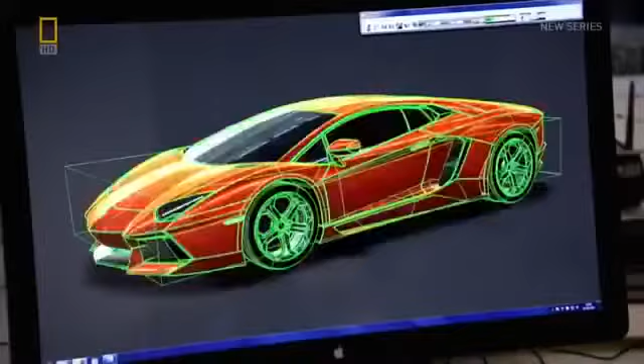But this will be no simple reworking of Lamborghini's old flagship models. Its engineers and designers are given the task of starting with a completely clean slate. And at its mega factory in northern Italy, the Lamborghini team has been stretched to its limits to fulfill those expectations. Now, as its latest creation takes to the road, it will be seen if the high-risk strategy has paid off.

Lamborghini has been responsible for some of the world's most iconic sports cars of the past half-century. 350 GT, Miura, Countach, Diablo. The brand has achieved global recognition for its no-holds-barred approach to automotive engineering. Its extreme and powerful machines have placed it among the supercar manufacturing elite for decades.

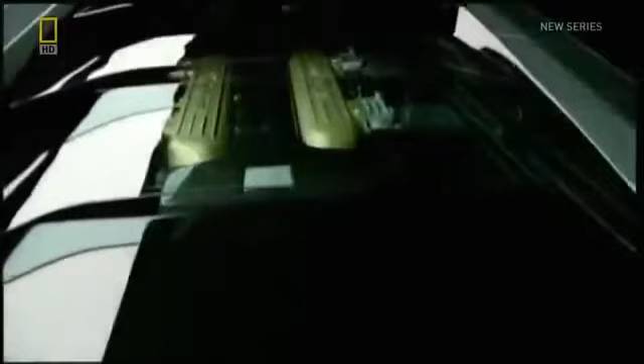But there's no room for complacency in this increasingly crowded marketplace. And a decade since the launch of their last flagship model, the Murcielago, it's time for Lamborghini to flex its muscles once again.

It's up to Stefan Winkelmann, the company's CEO, to come up with a bold approach. One of the toughest things was to give the right briefing, and it took us weeks and months. And once I went home and I was thinking about it, so easy, and it's just down to 2 words: no competitors.

4 years of intense development follow, conducted in fiercely secretive conditions. Our factory was as close as Fort Knox. We had to prevent anybody from coming in and taking any picture to avoid leakages.

But finally, in March 2011, at the Geneva Motor Show, Lamborghini casts off the secrecy and unveils its latest model, the Aventador LP700-4. Its launch has huge implications for the future of the company.

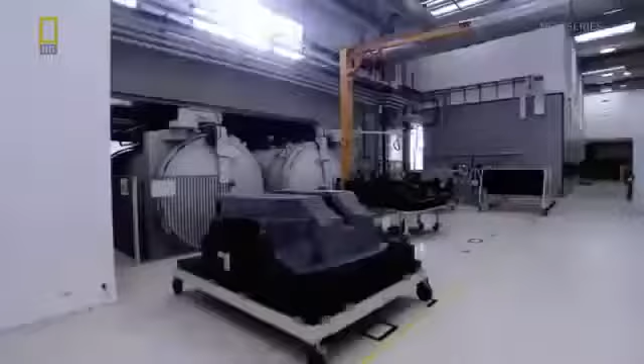But remarkably, speed isn't even top of Lamborghini's priorities for the Aventador. Stefan Winkelmann has laid out his vision in a manifesto for the future of the supercar. Now in our days, it's much more important to speak about the power-to-weight ratio, so the balance between the power of the car and the weight of the car. And for us in the future, it's much more important to reduce the weight because you get a better feeling, a better driving experience. The Aventador is the first test of this new blueprint.

The National Geographic Channel has been given unique access at the Lamborghini factory to witness the creation of some of the car's first incarnations.

This is Sant'Agata Bolognese, a typically picturesque town in the heart of Italy's Emilia-Romagna district, but it is in fact anything but typical, as it's home to Lamborghini, one of the world's most renowned supercar manufacturers. The factory is situated in the heart of what is known as Motor Valley in northern Italy.

Sant'Agata is intrinsically linked to Lamborghini's success, according to its head of communications, Raffaello Porro. Everybody in the world recognizes our cars come from Sant'Agata Bolognese. And so our factory is a kind of temple where people come, they can say it's a pilgrimage, to visit where those cars come from.

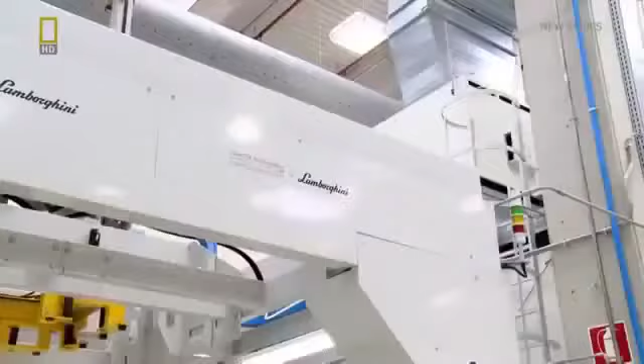The factory has seen many changes over the years, but its purpose has never wavered: to produce vehicles that challenge the status quo. And a largely local workforce is a vital part of that ethos.

They're coming from this region, not even from the region, they're coming from this part of Emilia. You know, we are in Emilia-Romagna, it's the Motor Valley, and this is in Emilia. So a lot of our people are not only living here, they were born here, they are here since generations, and a lot of workers we have in our factory, in our plant, are here at the second generation.

These people are Lamborghini's lifeblood. Over 400 individuals working with a singular aim, to produce high-end vehicles that consistently capture the public's imagination.

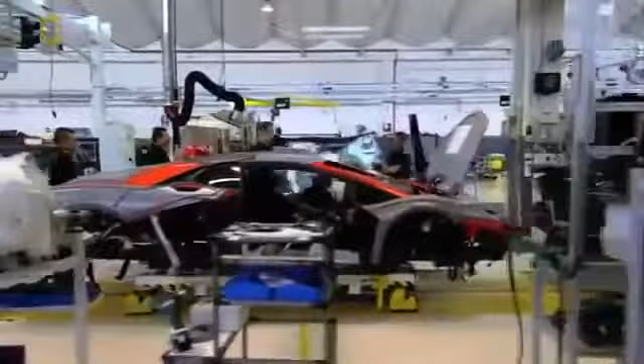In the last couple of decades, a new breed of creative and high-tech vehicle specialists has emerged. Companies such as Pagani and Koenigsegg have set their sights on toppling the most revered names in supercar engineering. Names like Lamborghini.

But it's unlikely that this Italian giant will let its mantle fall without putting up a fight, an attitude embodied in the company's emblem, the Raging Bull, partly inspired by the bravery of Spain's legendary fighting bulls, one of which showed such fearlessness in battle that it was awarded a trophy for its courage in 1993.

Its name was Aventador, and almost 20 years later its legacy lives on in Lamborghini's latest model. It's Aventador's battling spirit that Lamborghini's development team must channel.

In 2007, they're faced with the daunting task of creating a supercar that sets the standard for all others. Maurizio Reggiani, head of research and development, realizes that the only way of doing so is to take a step into the unknown.

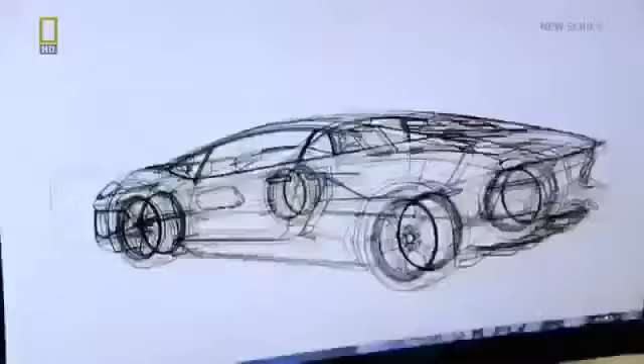To start from a completely clean slate is extremely high risk, and it's up to Reggiani to convince the board that it's the right thing to do.

This was one of the hardest things. Why? Because the project we were presenting had nothing in common with the old Murcielago, not with anything that existed in production at all. So it really meant beginning from scratch, with all the risks that come with that.

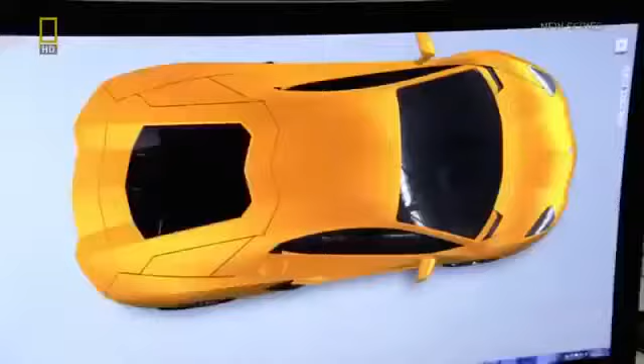But the board decides the risk is worth taking. At the end of the day, they understood very well, because this is again about what Lamborghini is all about - now, to recreate and to be always revolutionary in the approach.

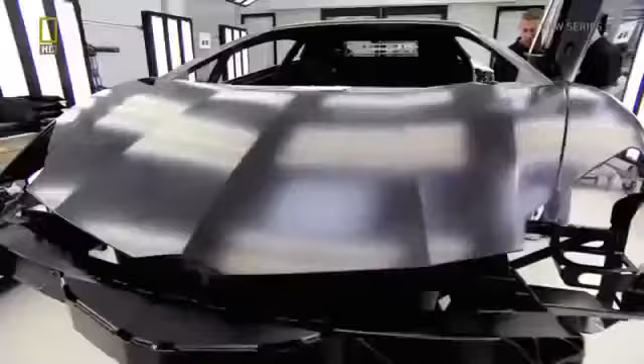The spirit of innovation is apparent in every fibre of the Aventador, as Lamborghini know that the fight to stay at the top won't be won through half measures. And nowhere is that combative approach more apparent than in their focus on lightweight construction, which they've taken to new levels with an entirely new concept for road cars.

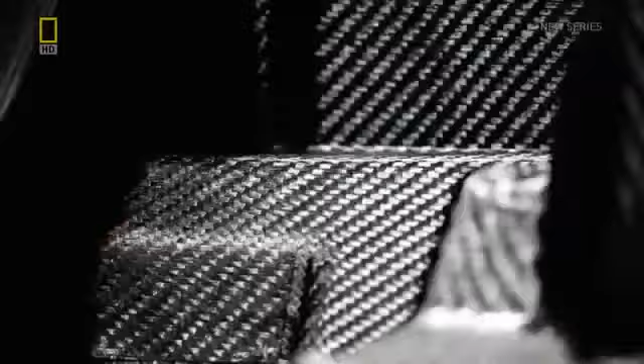A full carbon fibre monocoque. These structures are common in racing cars, but the high cost of materials and laborious production methods have made them unavailable to supercar manufacturers, who've had to combine carbon fibre with cheaper, heavier elements, such as aluminium. That is, until now.

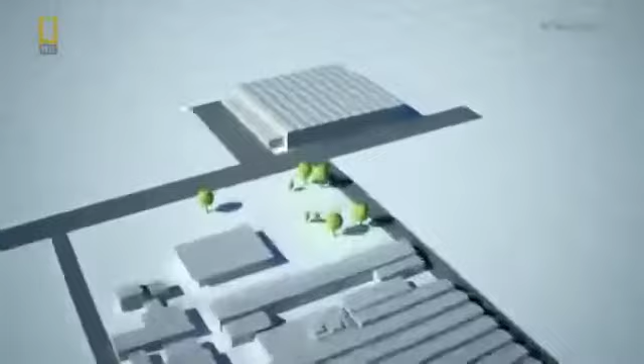The development team has devised a method that allows this race car technology to be mass-produced. But it requires a specialist facility that's up to the task. So in 2009 they build a whole new mega factory just down the road from the company headquarters, devoted to constructing the Aventador's unique carbon fibre body.

Which, being just 147.5 kilograms, helps make the Aventador significantly lighter than the Murcielago, considerably improving the all-important power-to-weight ratio, and in turn, the handling.

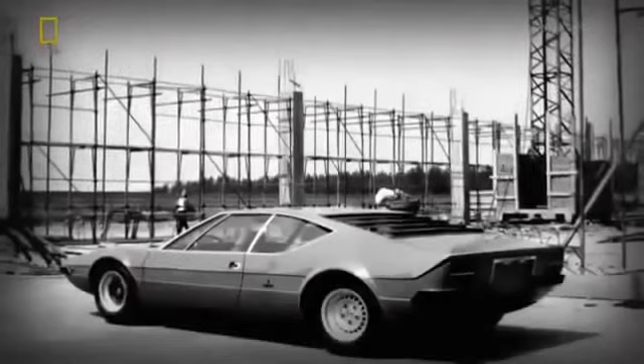Lamborghini hopes that this innovation will stave off the threat by the new wave of rival companies. Lamborghini knows well what it's like to be the cocky young upstart, vying to unsettle the established names, as that's how it began almost 50 years ago.

The man upsetting the status quo back then was the company's founder, Ferruccio Lamborghini. He had made a fortune from a tractor manufacturing business and used some of his money to satisfy his love of sports cars.

According to Lamborghini legend, when he went to Ferrari to critique some of their parts, his views were dismissed. He got a negative response out of some requests he had and proposals to make a better car. And so he said, I will found my own company and I will create the best super sports cars ever.

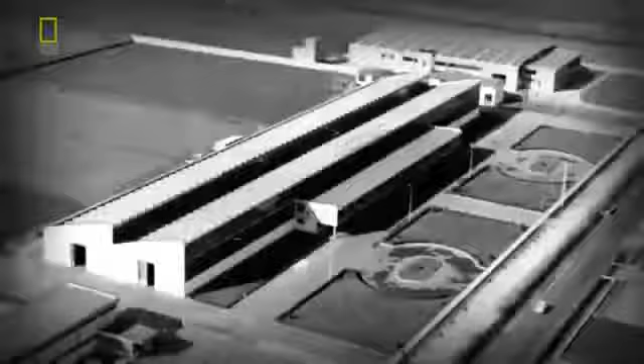He established Automobili Lamborghini in 1963, and for the next few years he toiled furiously to achieve his goal. The cars he created were well received, but it wasn't until the launch of the iconic Miura in 1966 that Lamborghini really made its mark. The tractor maker had succeeded in breaking into the exclusive world of supercars with his bold new enterprise.

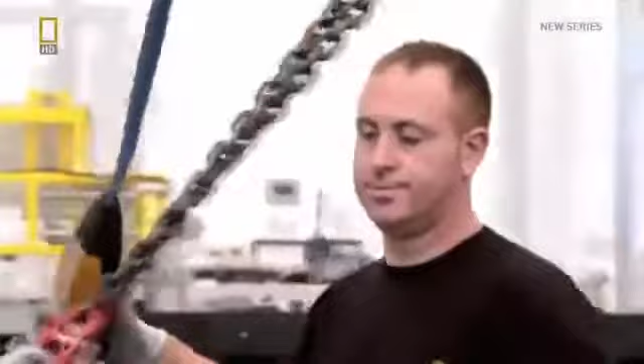Almost 50 years later, despite having joined the ranks of well-established sports car manufacturers, the company still strives to be edgy and uncompromising, as demonstrated by its approach to the area it believes will define the future of sports car engineering: lightweight carbon fibre construction.

The company's relationship with carbon fibre goes back as early as the 1980s, when it created the Countach Evoluzione, a concept car which experimented with the use of composite materials. It was dreamt up by the newly formed Composites Department, whose successor has made many inroads into research and development of lightweight composite materials.

And discoveries made here mean that next door, the company has been able to construct its new carbon fibre production facility.

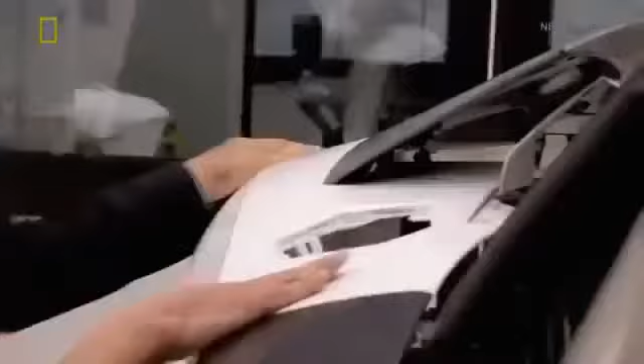The man given this task in 2009 is Ranieri Niccoli, Industrial Director, and he must devise it completely from scratch. When we design and build this factory, we didn't have any automotive benchmark. We were the only one in the automotive business to build and run this kind of technology.

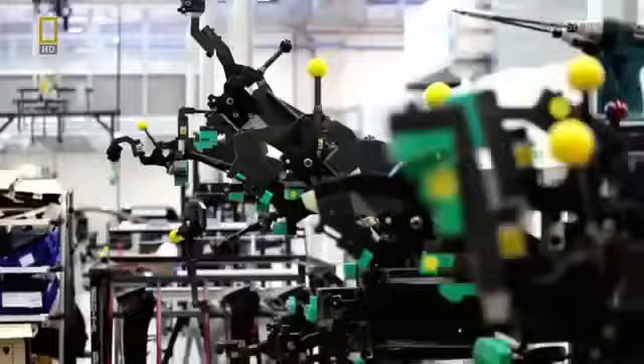So they have to look elsewhere for inspiration. We look to other sectors, for example the aeronautics sector, then we adapt and modify their process to create a Lamborghini production system in order to build our car.

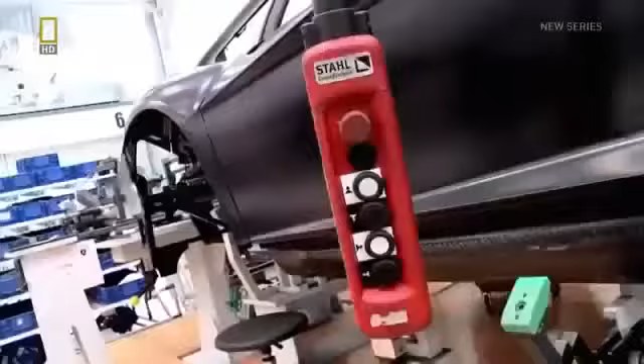The result is 500 square meters of new production space, known as the CFK, devoted entirely to sculpting the Aventador's super lightweight monocoque. Here, 146 carbon fibre specialists toil day and night to create 4 complete monocoques every 24 hours.

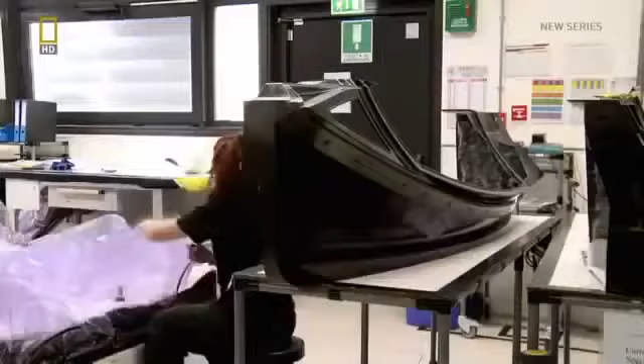To achieve this target, engineers have developed a unique production system. All materials are first cut by an automated machine before being sent for preparation. The material is placed into moulds and laminated in a vacuum bagging process which forces the layers into shape, before being cured in a large pressurized oven known as an autoclave.

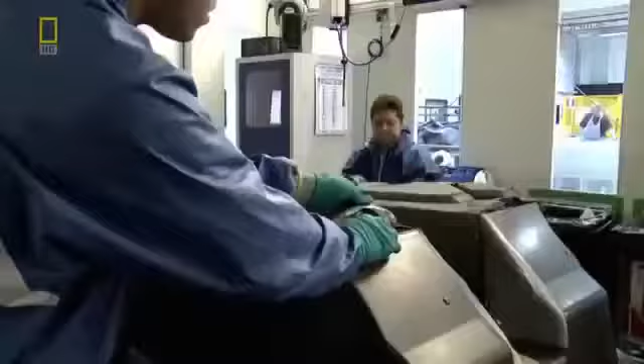Meanwhile, the production of other parts of the monocoque is underway, as operators fine-tune and cut more layers of carbon fibre with the assistance of precision lasers. A special press is used to inject resin into the carbon fibre mats, which transforms them from soft sheets of cloth-like material to a strong, rigid structure.

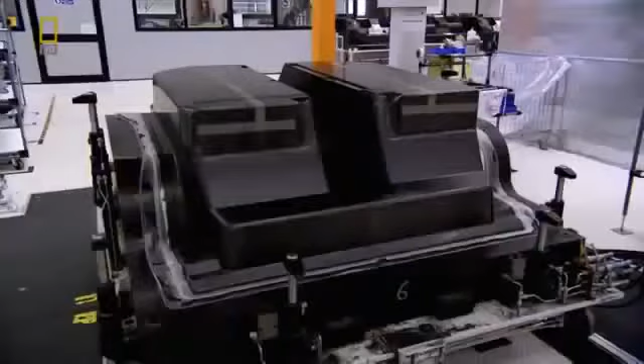After all these processes are over, the 2 key sections are finally recognisable: the base section, known as the tub, and the roof. They're placed in an automated machine, which drills them with holes allowing for attachments to be made later.

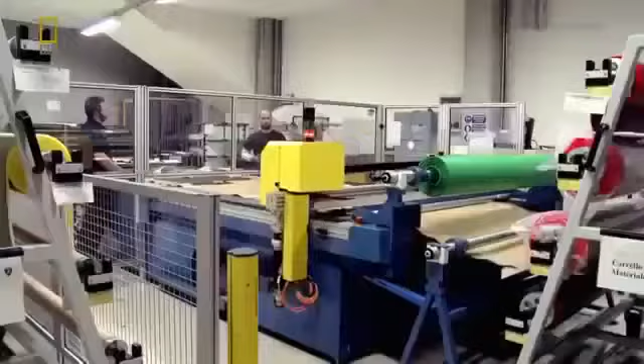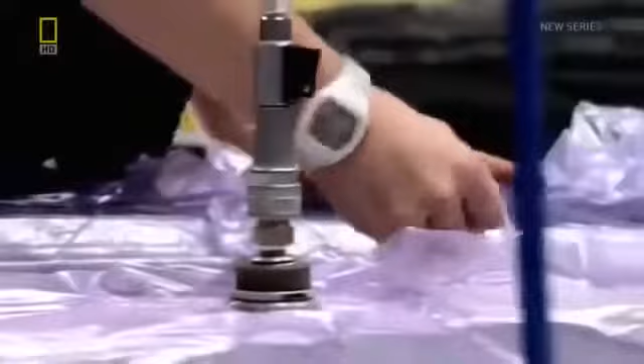Throughout the factory, computer-controlled machines share tasks with human specialists, a partnership that's integral to the Lamborghini production process. The main priority of our plant was to follow the Lamborghini production system, so, with a high degree of craftsmanship, high degree of skill, people, combined with technology, with an automatization process. This was the main challenge that you can also see in our plant.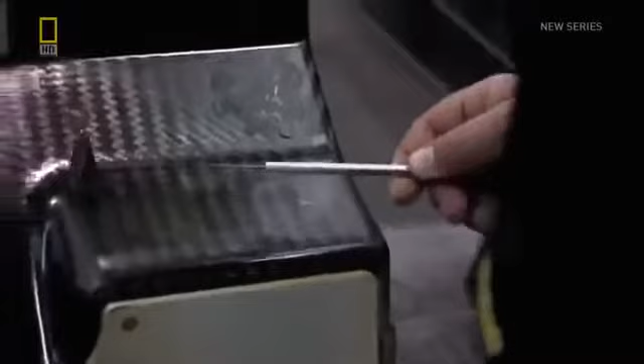Aeronautic-inspired engineering is ingrained in many aspects of the Lamborghini CFK production process, such as this stage, known as the Harmony Hammer Test. In this quality control test, an operator strikes the monocoque section with a specially designed hammer and allows it to vibrate, listening out for areas where air might be trapped in the carbon fibre shell.

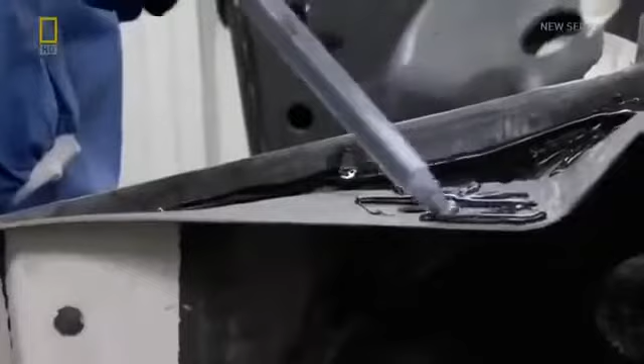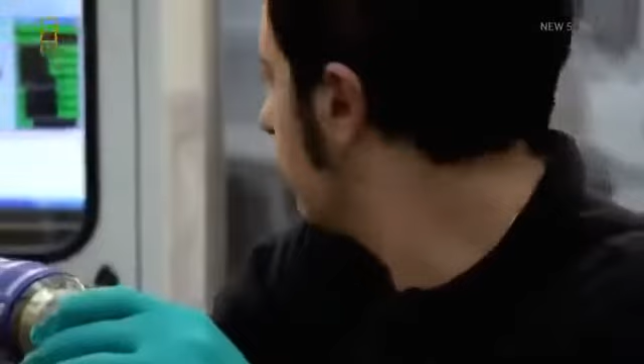Once checked, the parts are ready for their union, as the tub and roof are glued together, turning the monocoque into a single entity. It's essential that the 2 parts of the monocoque are exactly aligned, so workers use a robotic arm with a 3D laser attachment to check that the sections have been coupled correctly.

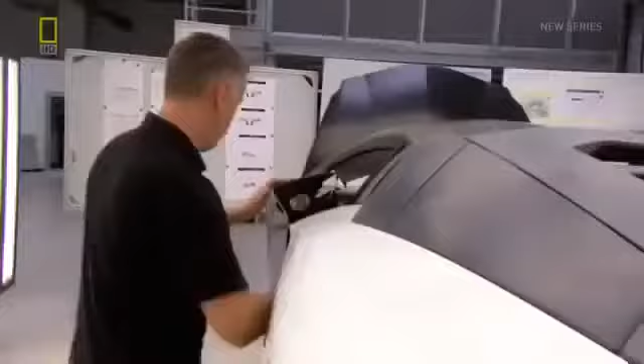Once the correct dimensions are confirmed, metal sections are manually attached to the monocoque and the body is complete. Then it's into a light tunnel where surfaces are quality checked to ensure they're in pristine condition before the Aventador's body is signed off for release.

As the body is ready to leave the carbon fibre plant, it's possible for the first time to see the Aventador's unique geometry taking shape. This extreme design is one of the most recognisable aspects of the Lamborghini DNA, and it's a tradition maintained and pushed forward here, at Lamborghini's Design Centre, or Centro Stile.

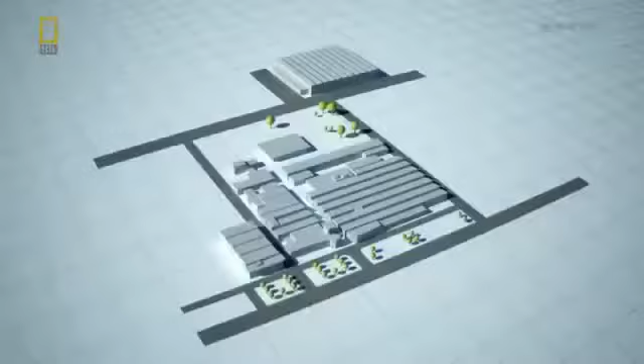The generational leap required of the Aventador does not stop with its engineering capabilities. The look of the car is integral to its ambition.

The design of Lamborghini always has to be revolutionary. Yes, you have to understand, if you see a car in front of you, this can only be a Lamborghini even if you don't know the model. So it's about our ability to create something new, but recognizable at the same time.

The job of the design team and its chief, Filippo Perini, is made even tougher during the earliest phase of the Aventador's development, when the board forces them to compete with outside companies to earn the right to design the new model. And at one point, victory comes close to slipping through their fingers.

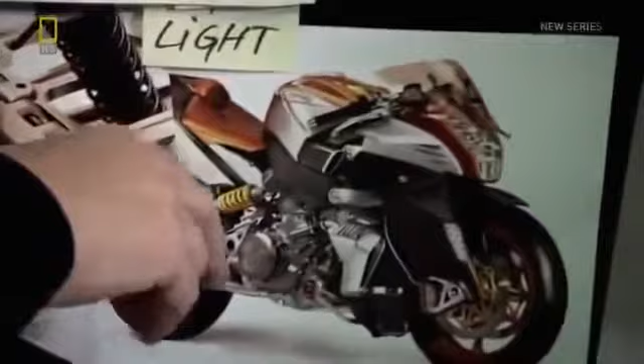Details like the ignition button and TFT screen seem to come direct from a jet fighter cockpit. And the world of aeronautics influences a lot of other style choices besides. We think that aeronautics, airplanes, fighter planes, but even transport planes are the nearest expression to true beauty and the most advanced design that you can have from an artistic point of view, and also of functionality.

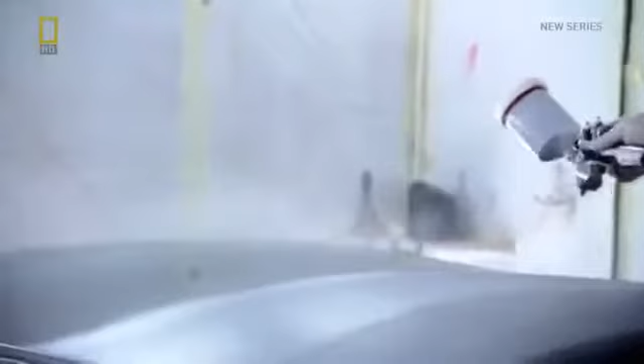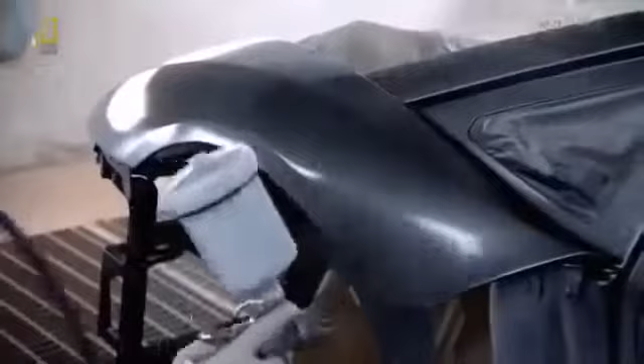After the CFK, it's taken away to be given one of its most important characteristics: its colour. Here at the paint shop, it's lavished with the kind of attention that most cars could only dream of. One of 13 colours are hand-sprayed over every part of the bodywork. 27 pieces are given individual attention by a specialist who covers them with 8 litres of paint. The Aventador, with its extreme lines, requires more man-hours than any other Lamborghini in the past.

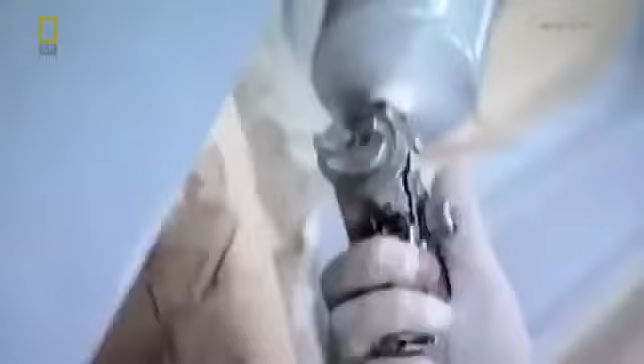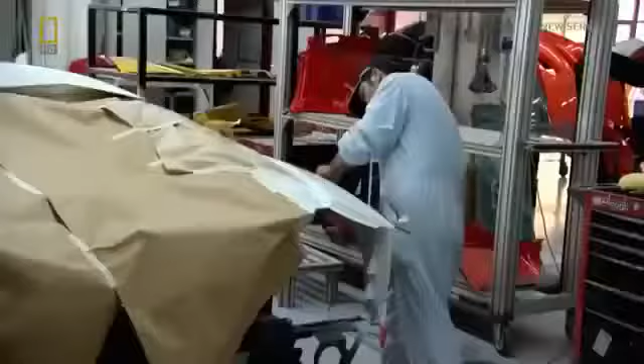Every phase is carried out manually, as only human analysis and dexterity can ensure that each surface is covered with exactly the right amount of paint. In total, 200 man-hours are spent on every single Aventador while at the paint shop. 3 whole days are spent on polishing alone. After being carefully sanded, the Aventador is repeatedly buffed with special materials.

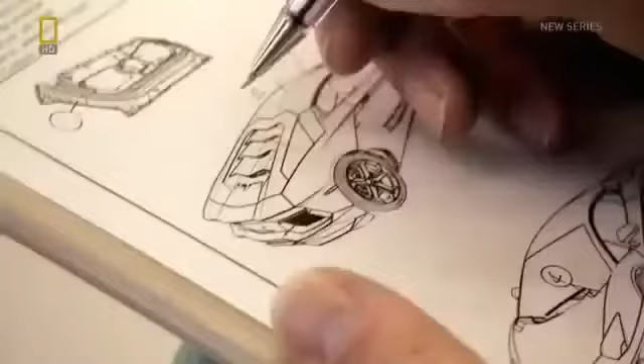After that, it's sent for another quality check in a light tunnel. For 2 hours, an inspector walks around the bodywork, checking for colour perfection. If there's any inconsistency, the offending section will be sent back to be repainted. Under-polished areas are also marked out for extra attention. These hundreds of hours of devotion end when the exacting standards of the inspector are met, and the car is released for the next phase of production, the assembly line.

The assembly line for the Aventador lies just meters from the original site of the Lamborghini factory, built almost half a century ago.

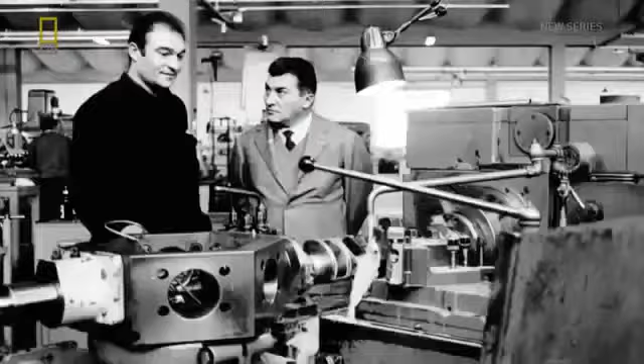Back then, its founder, Ferruccio Lamborghini, was known for his hands-on approach, frequently seen on the factory floor, directing operations. He focused on the skill of the mechanic as being key to the success of the product, and that attitude still permeates the site today.

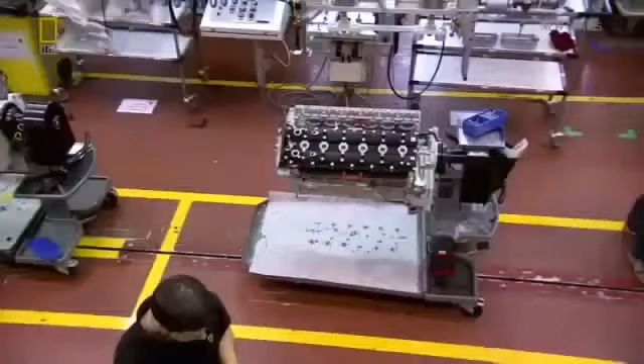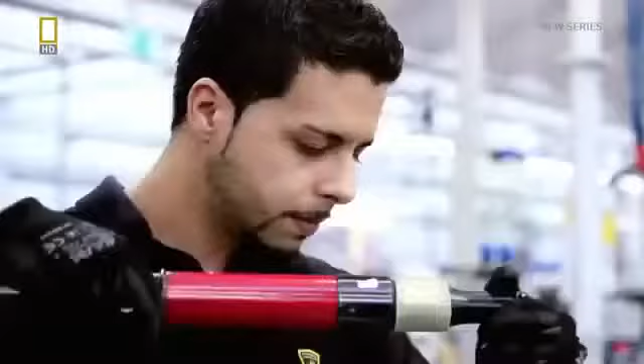Here, 50 workers spread over 11 workstations are responsible for the task of assembling Lamborghini's latest model. The man in charge of making sure things run smoothly is production manager Andrea Costantini. He sees his highly trained workforce as a direct link with the roots of the company.

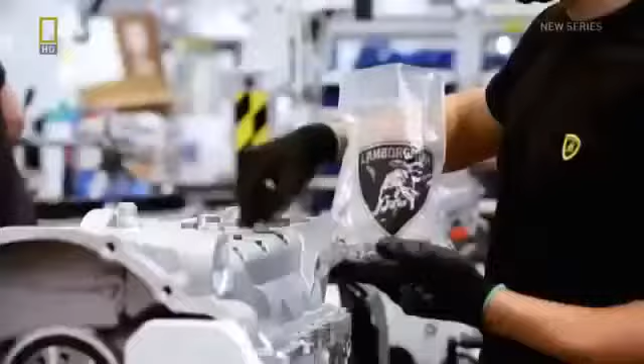In this case, the workers are the most trained. We take these guys directly from the best schools of mechanics in Emilia-Romagna, here in the surroundings of Lamborghini, and we train them for more than 2 years to allow them to become really the best experts on mechanics and engines. So everything is done manually, still like we did since 1963, since when Mr. Ferruccio Lamborghini, the owner of Lamborghini, started.

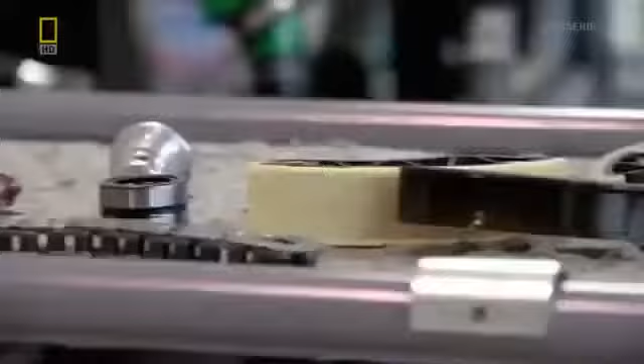In an age when machines dominate production in almost every field of manufacturing, loyalty to the art of skilled manual labor is not often seen. But here it's believed that when it comes to reliability and precision, humans still have the edge over machines.

And nowhere more so than in the engine assembly station. For this is where the heart of the Aventador is put together. The Lamborghini V12.

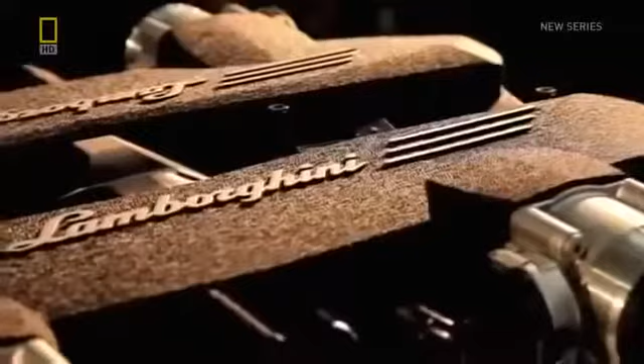At a time when many sports car manufacturers are shying away from using the 12-cylinder engine, Lamborghini is resolute. The V12 always has and always will provide the power for their flagship models.

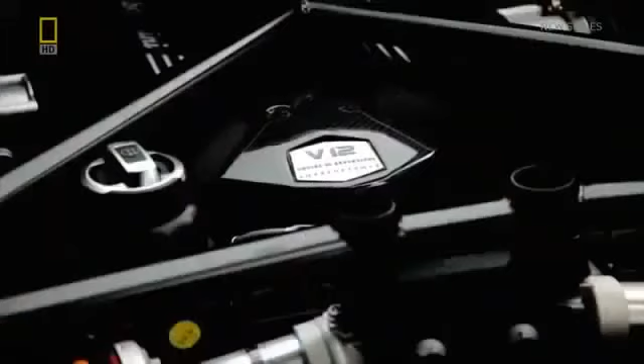The V12 for Lamborghini is part of our DNA. Everything for us is rooted in our history, which started with the 12-cylinder engine.

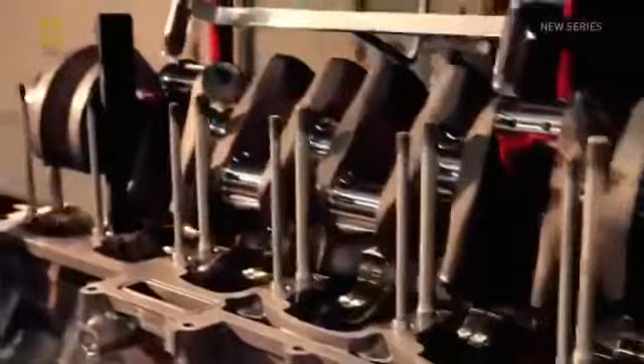With 6.5 litres of displacement and 700 horsepower, the Aventador's V12 is about as gutsy as it gets. But as with everything else, it's had to move with the times.

Lightweight, again, is the order of the day. And despite the fact that this engine is more powerful than the Murcielago's, it weighs less, just 235 kilograms, by using aluminium silicon alloy on components such as the crankcase.

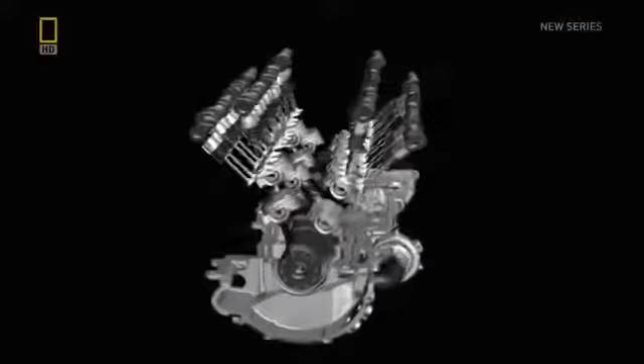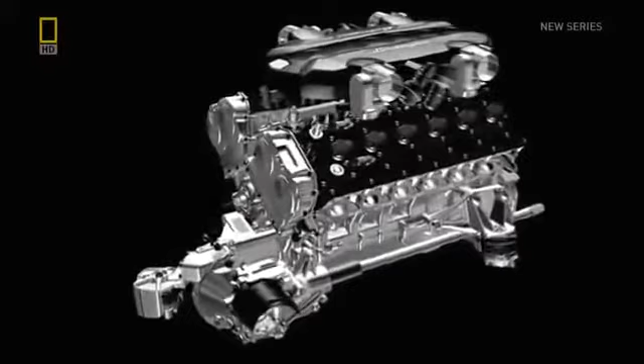The main purpose of the V12 is to power the Aventador, but when linked with the car's exhaust system, it takes on another significant role: creator of the mighty Lamborghini orchestra.

The V12 motor represents what for us is the sound, the music of the car, the way in which it's presented to the public, the way she makes herself heard and announces her arrival.

To achieve this, we invest a great deal of time in simulations. We simulate the sounds that we can have, and then we experiment first in the lab and then on the vehicle itself.

This 12-cylinder symphony has a full range, from a moderate rumble through the town at low revs, to the screaming crescendo of maxed-out gear shifts.

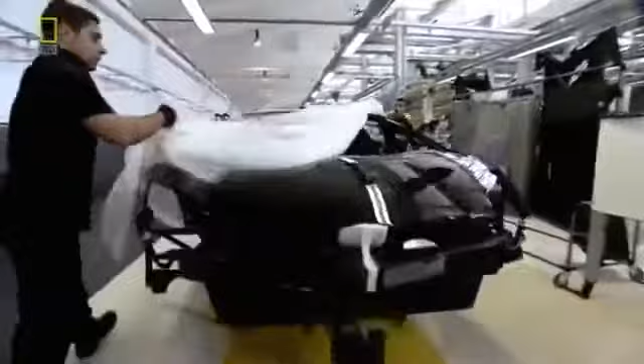While the V12 is being assembled, the body of the Aventador arrives on the assembly line, ready for conversion from an empty shell into a fully functioning supercar.

As the company's latest foray in a highly competitive market, the Aventador needs a production process with efficiency to match.

The drive for improved efficiency came from the market, from our competitors. We have always to be the best, to be number one in terms of product, in terms of performance, but also in terms of quality. So to become and stay number one, we have to have a huge increase of efficiency, a huge increase of quality in the assembly line and in all the processes inside the factory.

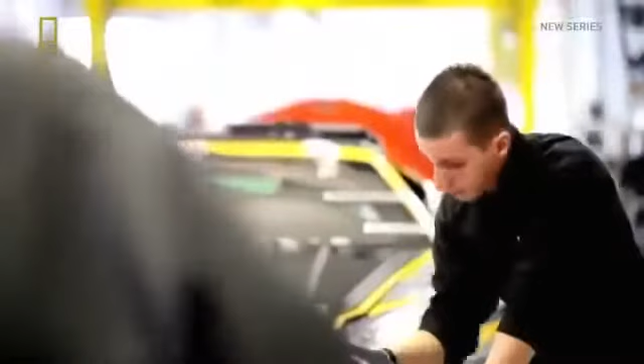The company's output of luxury vehicles is a mere fraction of what the large-scale manufacturers produce for the mass market, with around 800 Aventadors due to be created in the first year. But that doesn't mean the factory can't be run to similarly exacting standards of efficiency as the largest groups.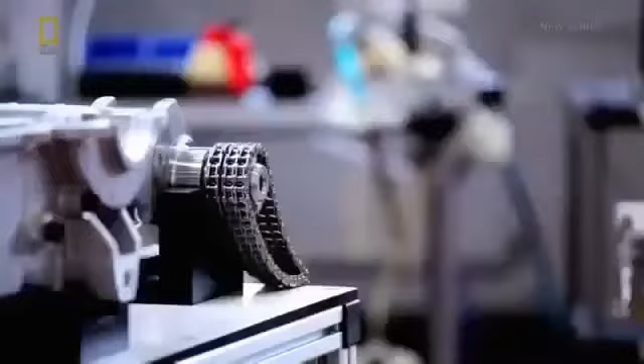And that means that workers have just 1 hour and 40 minutes to carry out a whole range of highly meticulous tasks. If they take too long, the whole assembly line will stall, targets will be missed, and costs will mount up.

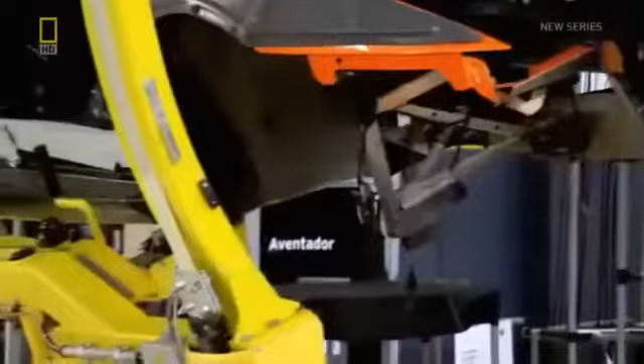The countdown starts here at the first station. Work is carried out on the underbody and front differential by lifting and rotating the vehicle to give the mechanics easy access.

Before being readied for what is arguably the most significant stage in the Aventador's production: the insertion of the colossal V12 powertrain into the car's chassis.

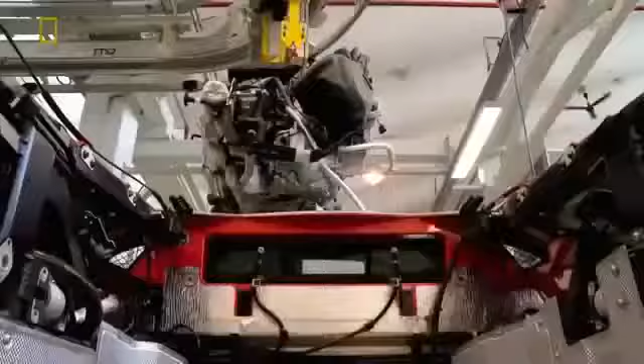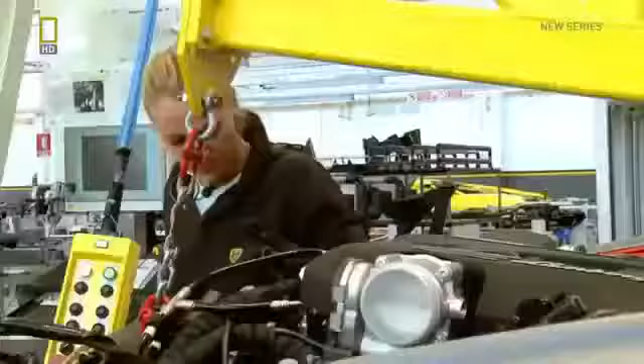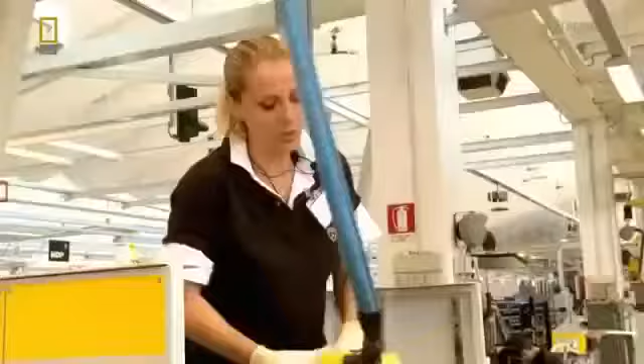Here we are in the most critical assembly station of the Aventador assembly line. Here we have the assembly of the engine, the heart of the car, basically inside the body. We call it the marriage between the car and engine. This marriage of elements is when the development team's work of the past 4 years comes together, where design and engineering combine.

Here, as with all other phases of production, the specialists of each station take full responsibility for their section. You can see the workers check each and every single connection to be sure that each phase was done correctly. The risk is that the car is not working properly during the road test, which could be a big problem for a customer. As you can see, this is not done with equipment, robots or other automation, but is done manually.

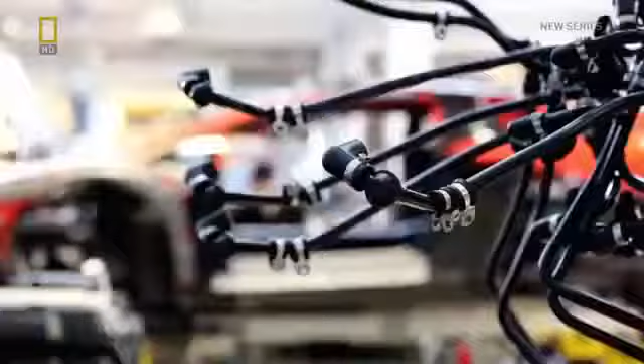Step by step, the car is taking shape, being molded from an empty shell into the fully formed supercar that will leave the factory.

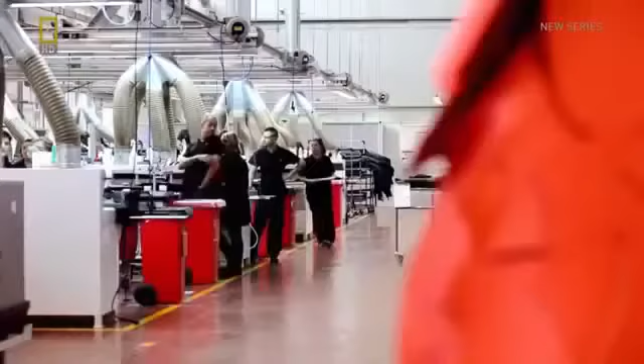And while the assembly line is in full flow, next door, the second critical aspect of the Aventador is being prepared: the interior. It's in this sector of the factory that a customer's individual preferences for the way their car looks can really be indulged.

About 100 square meters of leather hide in 9 different colors arrives each day. Attention to detail is essential to pass the stringent quality control checks.

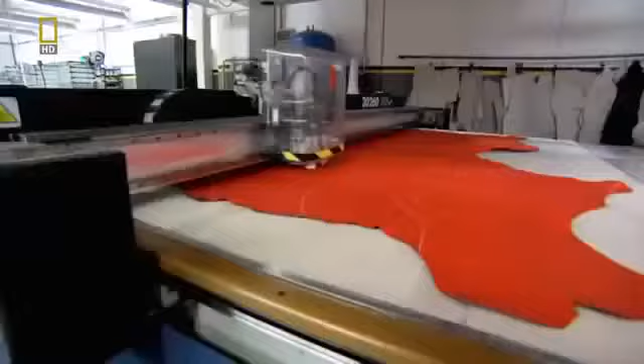Here, a leather specialist looks for minor imperfections in the hides and marks them up wherever found. An automated machine recognizes the marks and cuts around imperfections, leaving only pristine material for the Aventador's interior. The leather is then taken to specialists with 3 years of training to be stitched and glued onto the various parts that make up the Aventador's interior.

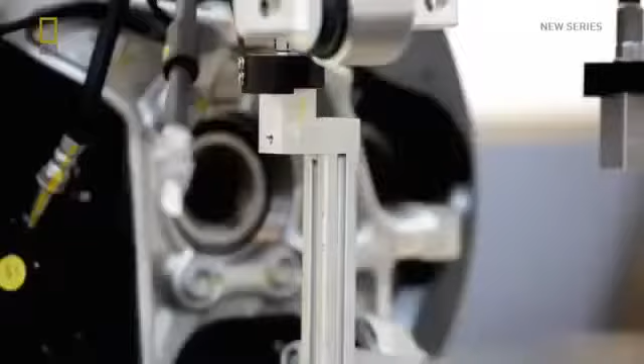Back on the assembly line, one of the Aventador's most important pieces of kit is ready. This simple-looking item is the suspension, but its apparent simplicity belies the creativity that goes into its engineering.

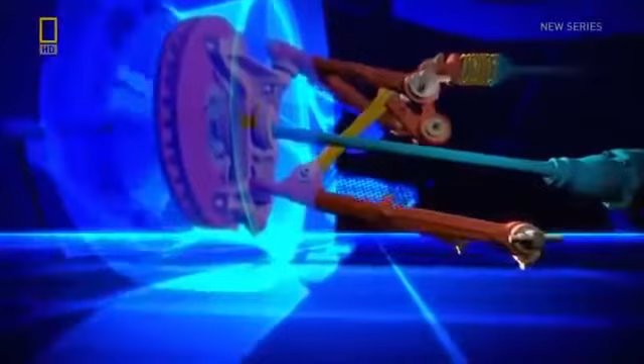The Aventador uses a pushrod suspension system direct from the world of Formula One race cars. It works by keeping wheel control and damper elements separate. By keeping the damper elements inboard, the pushrod system allows the wheels to maintain maximum contact with the road when going round bends, massively improving the handling on corners. A must for a car that can hit speeds of up to 350 km per hour.

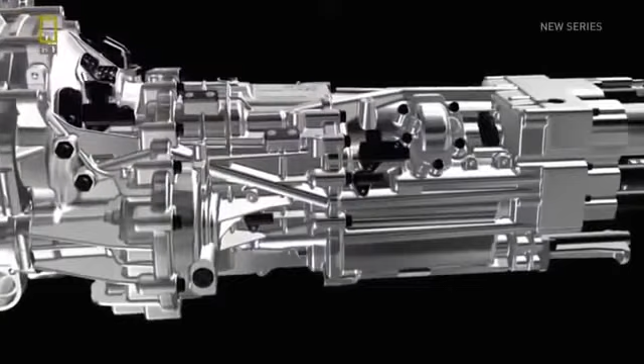But it's what's happening away from the eye that's most remarkable: the Lamborghini patented independent shifting rod transmission. This technology allows the shifting process to run virtually in parallel. While one shifting rod is disengaging one gear, the second shifting rod can already engage the next gear, creating a shifting time of just 50 milliseconds—not far off from Formula One transmission times, which average around 30 milliseconds.

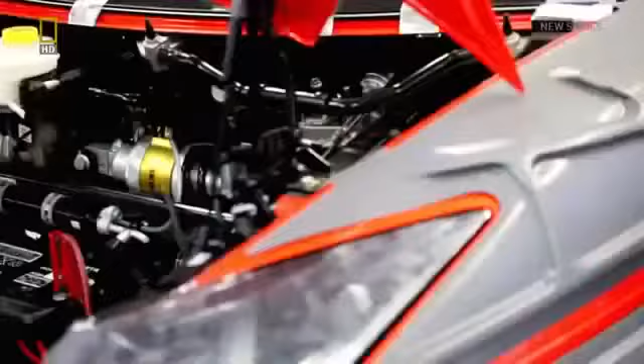Such technological innovations are only made possible by extensive testing of the vehicle during the development phase. Possibly the most critical moment for the engineers is when the prototype model takes to the track to be put through its paces for the first time. For the Aventador, this happens back in 2008.

Then we found ourselves at the first track run of the Aventador, which generated an indescribable emotion. At night, on the Nardo track, a small group of people saw a creature move for the first time—something that had needed years, nearly a year and a half, before it was able to move. And the perception after these first laps, based on what our test drivers told us, was that we'd created something that really was the new landmark for super sports vehicles.

The man behind the wheel of that prototype Aventador was Lamborghini's chief test driver, Giorgio Sanna. He's been a key member of the Lamborghini development team since 2001. A dream job for many, but the thrill of driving prototype supercars comes with certain pressures.